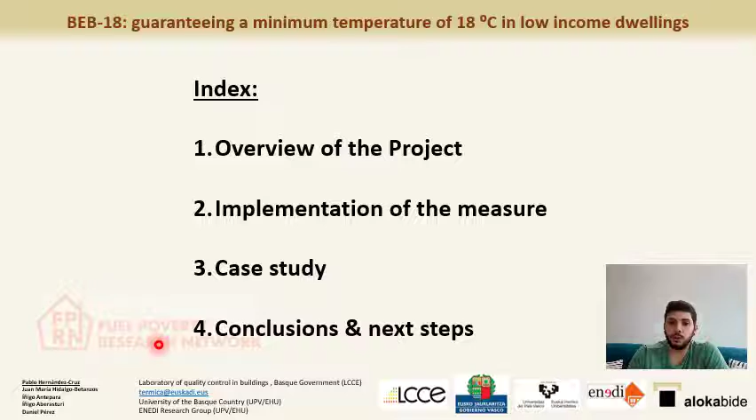This is the index of the presentation. I'll start with an overview of the project, then explain how this measure will be implemented. Later, I'll explain a specific case study that is being developed, and finally some conclusions and next steps.

The Basque Country is an autonomous community located at the north of Spain, where the co-official language is Euskera. BEB means Bero eta erosotasuna bermatuta, which literally means warmth and comfort guaranteed.

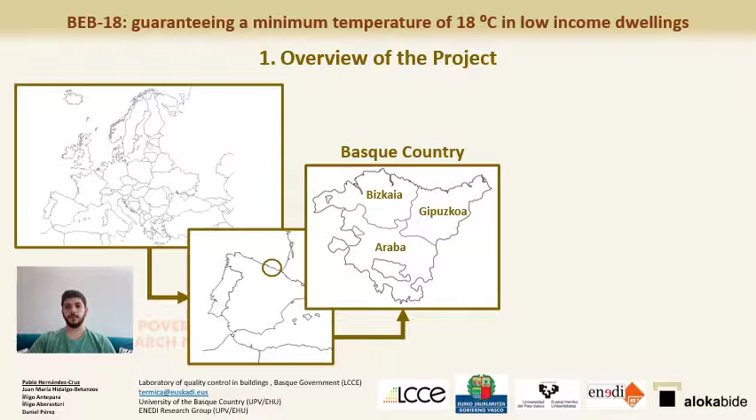In the Basque Country, the social housing public manager is Alokabide, and this public institution manages around 15,000 dwellings, making it one of the greatest social housing building stocks in Spain.

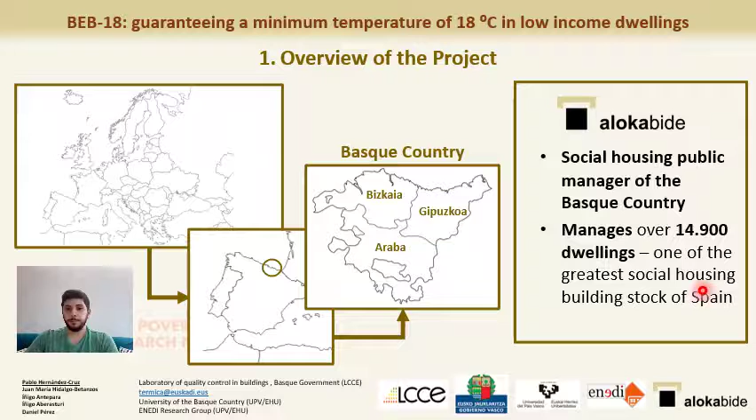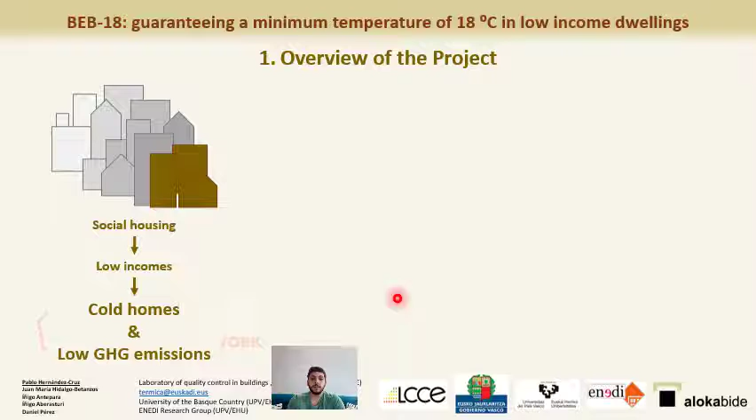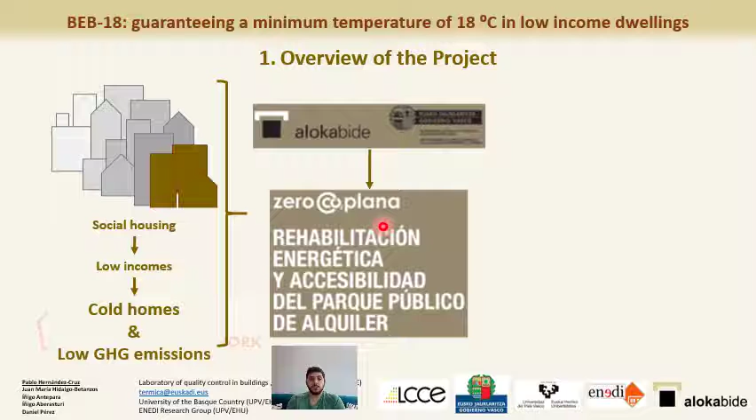We all have this relation between social housing and low incomes, which at the end means cold homes and low greenhouse gas emissions. To tackle this situation, Alokabide and the Basque Country government have started a project called Zero CO2 Plana, which consists of refurbishing the social housing stock and reinventing the management model.

This initiative answers some of the European Energy Performance Buildings directives and other directives at national and autonomic level.

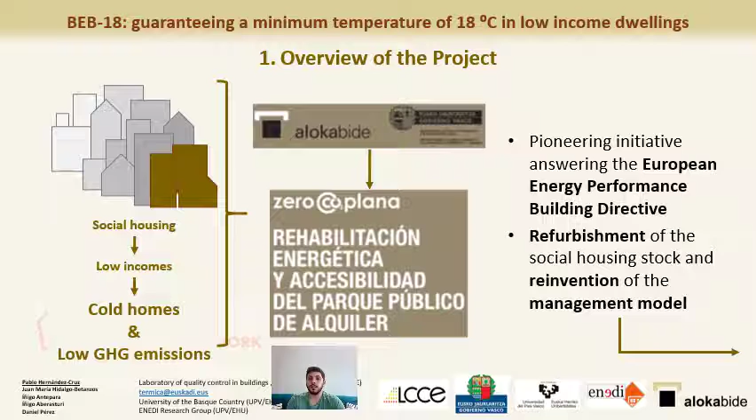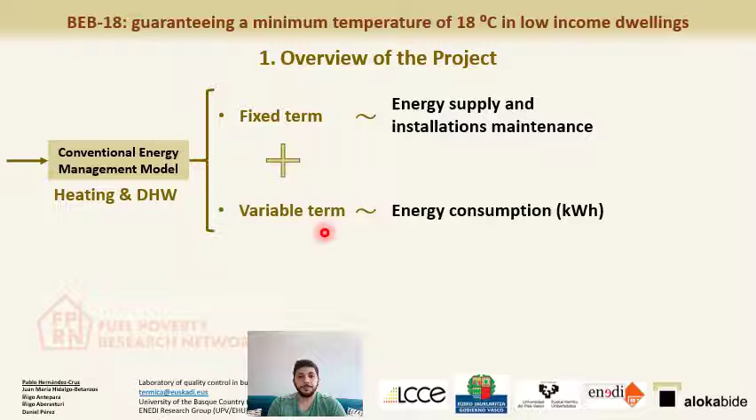How will this project change the management model? Till now, the conventional energy management model for heating and domestic hot water consists of a fixed term, related to energy supply and installation maintenance, plus a variable term which is directly dependent on the energy consumption of the dwellings.

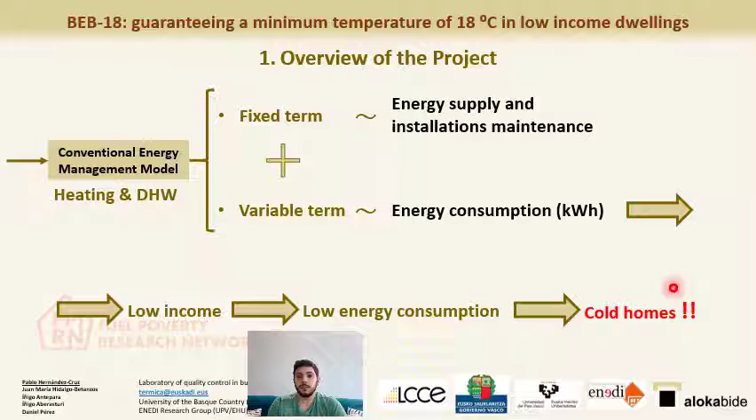So if we are talking about low-income dwellings, this means that these dwellings have really low energy consumption, which at the end means cold homes or energy poverty.

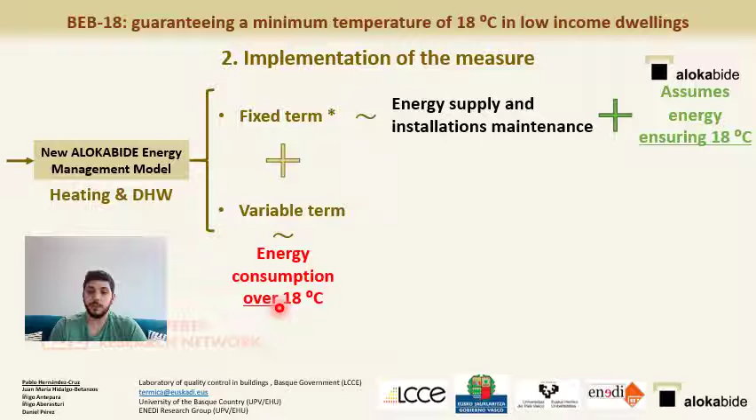So the new Alokabide energy management model for heating and domestic hot water will consist of a fixed term, modified to contain the energy supply and installation maintenance, plus the energy to ensure a minimum of 18 degrees in each dwelling of the building. The cost of this energy will be included in the fixed term, plus a variable term that will depend on the energy consumption over 18 degrees in each dwelling. So if a tenant is able to have their home at more than 18 degrees, it will be at their expense.

Here we have a short example. For a specific dwelling of Alokabide, the tenant has chosen with its BMS system to be at more than 18 degrees some parts of the day and less at other parts. So what we will have is that the energy till 18 degrees will be assured by Alokabide, and the energy above 18 degrees will be at the owner's or tenant's expense.

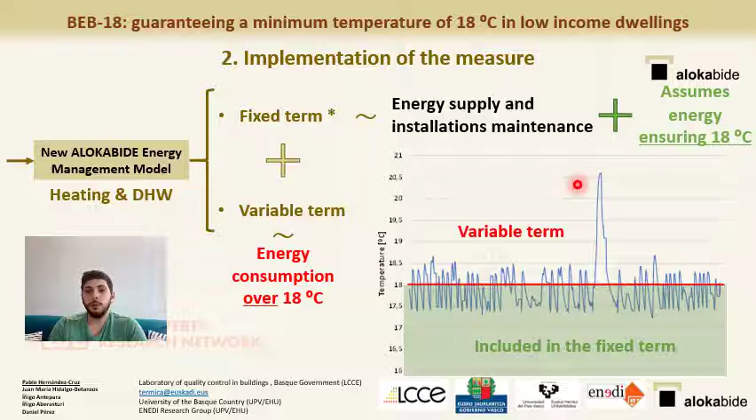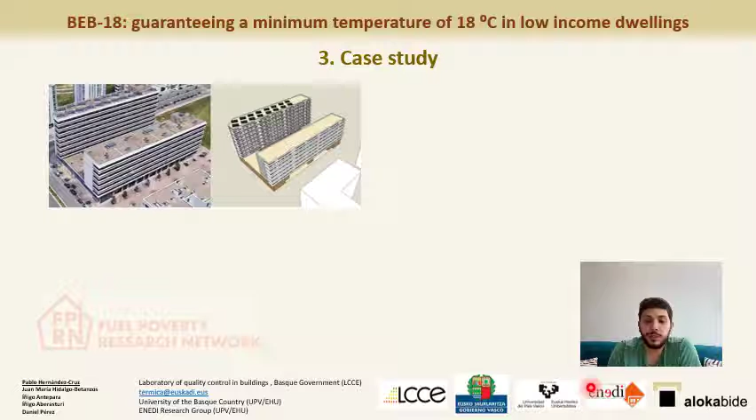This is a specific case study being developed by the ENEDI research group, on a real building managed by Alokabide located in the capital of the Basque Country, Vitoria-Gasteiz. This building is being completely monitored, and we have the energy consumption of the dwellings and the indoor conditions.

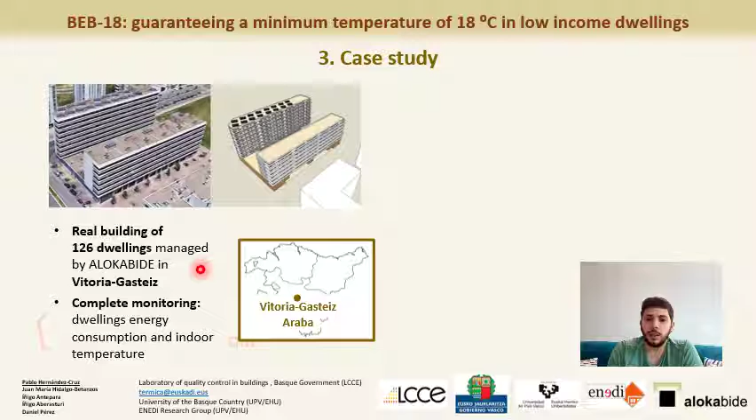After detailed analysis of the consumption and indoor conditions, we found that a high number of homes live under 17 degrees — around 53% in cold season and 29% in mild season.

Plus, this building, which is a centralized installation, is really inefficient because due to the low consumption of the users, much of the energy burned at the heaters is lost in distribution — over around 60% of the energy is lost in distribution.

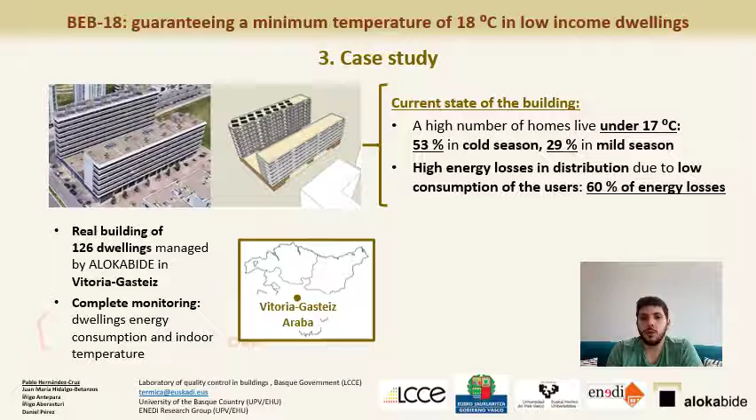We did a simulation calibrated using the monitoring data, and what we found is that if we implement the BEB18 case in the simulated building, we will ensure that none of the homes will be under 18 degrees. So there won't be cold homes, and we will only have an increment of 4% in heating consumption. So the increase in greenhouse gas emissions is insignificant versus the achievement of comfort and the depletion of energy poverty with this measure.

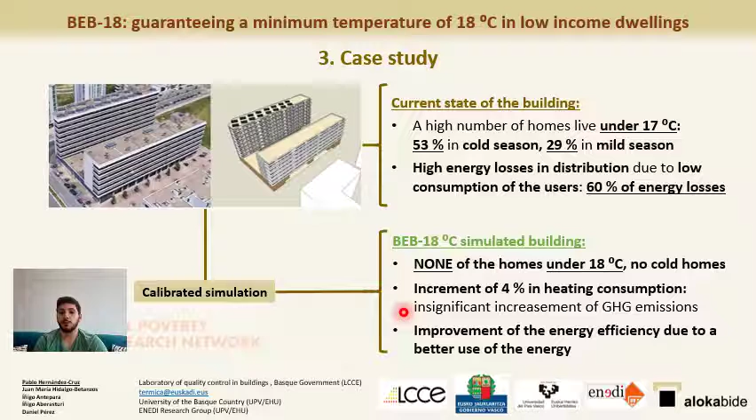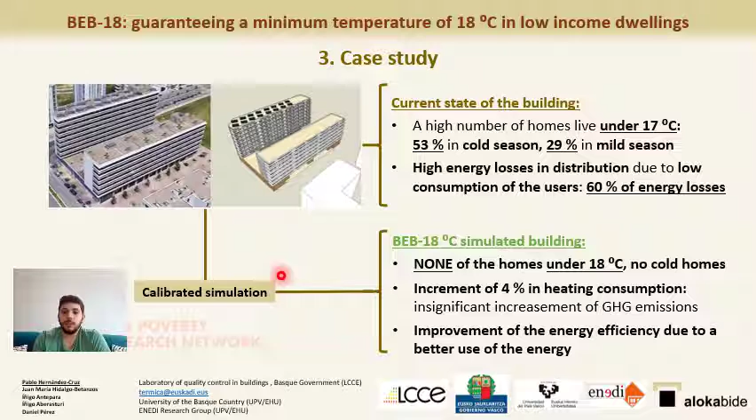Besides, because the energy is now being used by the tenants and not lost in the distribution process of the building, we also have an improvement in energy efficiency.

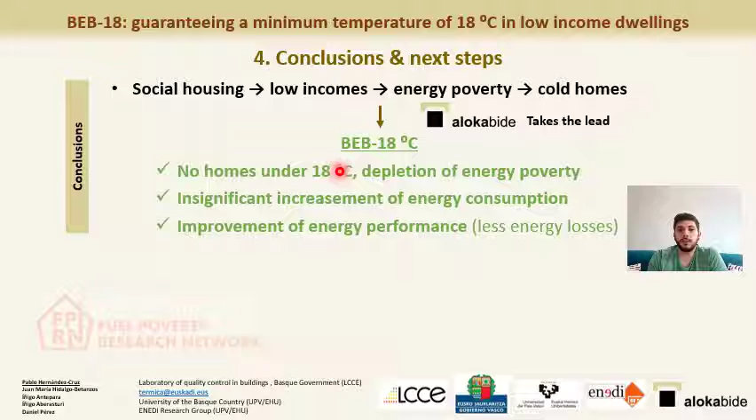So which are the conclusions of this study? This is the focus of our study: we have social houses with low incomes, which means they are cold or with energy poverty. Alokabide, the social housing public manager of the Basque Country, will take the lead in this situation, offering and guaranteeing a minimum of 18 degrees in each of these dwellings. So no homes will be under 18 degrees, and we will somehow end energy poverty.

There will be an insignificant increase in energy consumption and also an improvement in energy performance, because now the energy is being used by the tenants and not lost in the heating and domestic hot water installation.

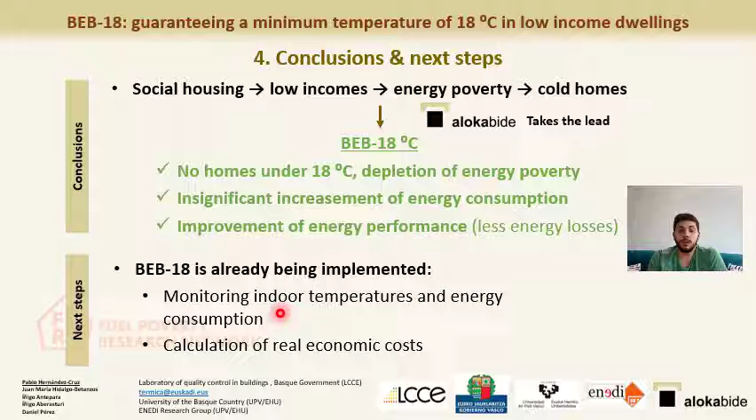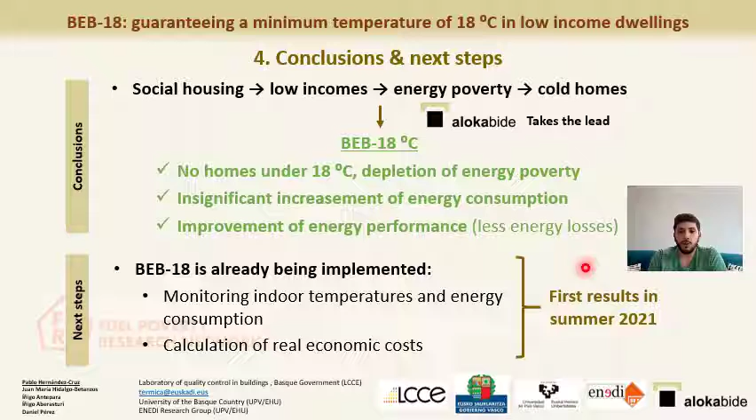The next step of this study is that this project is already being implemented in the building we previously saw. We are monitoring the indoor temperatures and energy consumption with these measures, and we will be able to calculate the real economic cost. We will have our first results in summer of this year.